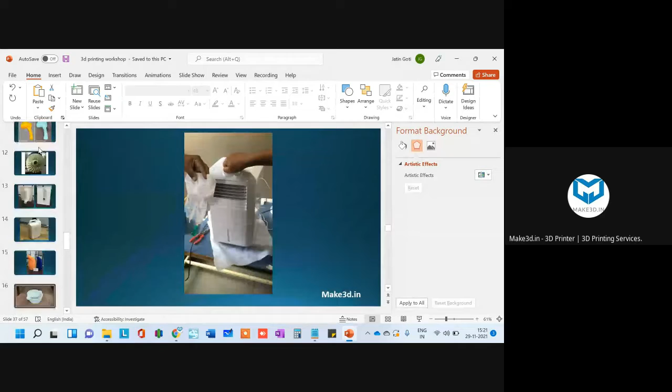In today's session, we will understand how 3D printing actually works, what 3D printing technology is, what are the different types of 3D printing technologies available in the market, and what are the applications, because application is the most important factor in accepting 3D printing technology. It's not like 3D printing can be used everywhere by everyone; there are dedicated applications where we can use it, and we need to understand that.

But before that, I just want to understand from you guys, how many of you have heard about 3D printing technology before this, and how many of you are aware of this technology? You can ping your message, let's make this session interactive. You can message yes, I am aware, if you are aware of 3D printing technology, so that I can get an idea about the audience.

Okay, Yamini said, I am aware. Great. Any other person or student who is aware about 3D printing technology?

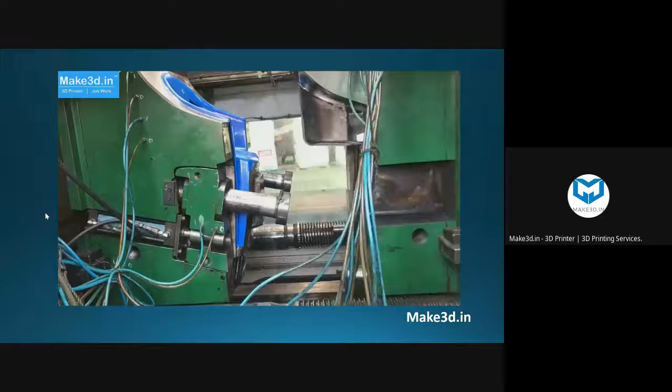So I'm going to showcase one video, kindly have a look. This is the injection molding process - it's a heavy duty injection molding machine in which male and female cavity is there, and we can make a chair out of it. By means of granules, we heat the granules, and using the injection molding process, you can see here is the mold and die - on the left hand side it's the mold and die.

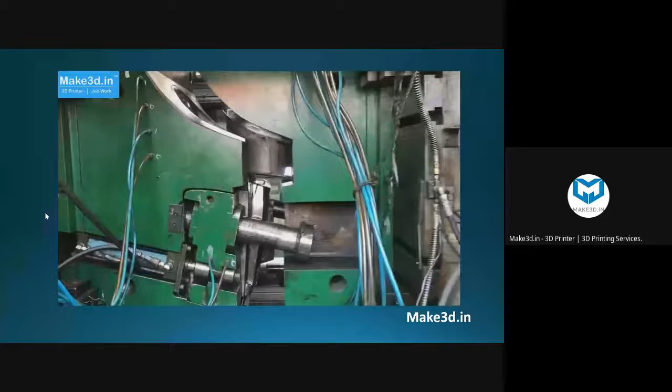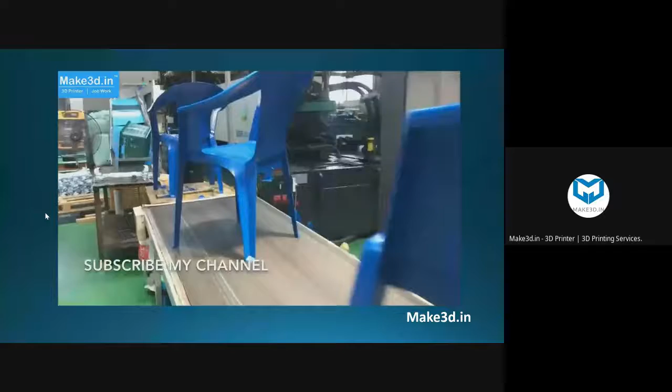By inserting the plastic granules and applying some heat, it gets converted into the shape of our cavity. From the right side you can see the different portions - the male and female cavity get converted into the shape of a cavity or die. This is the chair manufacturing process, one of the products. The same way we have different products using different processes at the same or different levels, so you'll get the idea once this video completes. Kindly have a complete look at the video - the second way, here we are making a tub, a water tub.

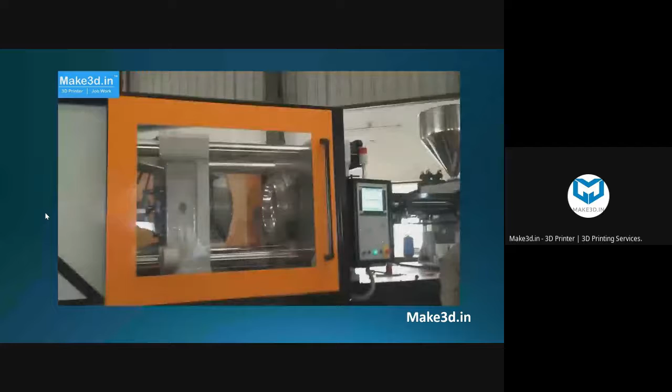Everyone aware about this product, right? So this is also used here. We can also use injection molding process. Yeah, this is the plastic water tub. Everyone can find it, right? Or everyone is aware about it. So it's an injection molding process we are following.

The orange and the black machine was the injection molding machine. This is a very desktop kind of small injection molding machine in which we are making some small plastic parts. Here also we are using die and mold. Multiple cavities are there. We are inserting the granules, and the granules get converted into the final product. But it's a desktop kind of small prototype and small injection molding machine.

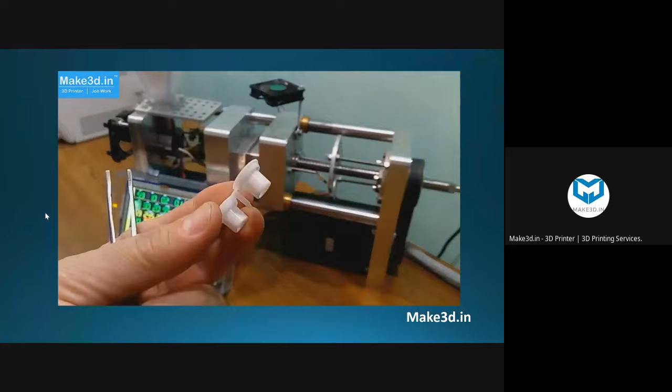So from small level plastic product to a big level or multiple uses of plastic product, or heavy duty plastic product, we have different kinds of machinery or conventional manufacturing processes to make that product. So it's our responsibility to think about it. When we are going to be an engineer, we need to think about it, like how it's made, what are the processes to follow to make such a product, right? So yeah, hopefully you get an idea about the injection molding process.

Now we need to think, or we need to understand the product from start to end, like how it's made. So we need to follow the product development process, because our today's subject is to use 3D printing technology to make innovative products, right? So that is why we are understanding the product development process. So how it actually works in the industry.

So if we consider the product development process, it falls under 4 steps: design, prototyping, verification, and manufacturing. And 3D printing technology will find application in the second and third steps, prototyping and verification. And why prototyping and verification is important, you will understand in the next slide, right? Because it's very important stuff when we are making a product. So we can't do direct design and manufacturing. We can't skip prototyping and verification step. Every industry currently follows these 4 steps to make any product: design, prototyping, verification, and manufacturing. And that is why 3D printing is useful to develop innovative products, right?

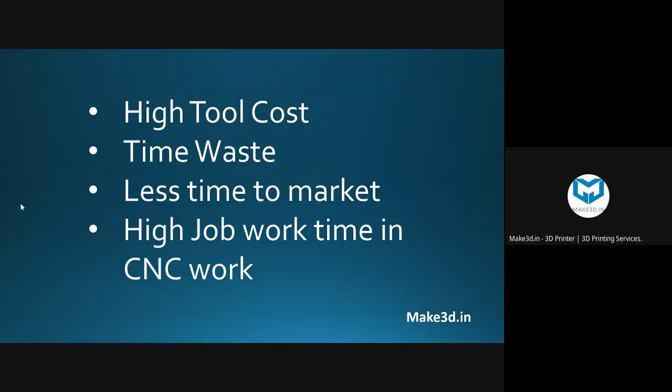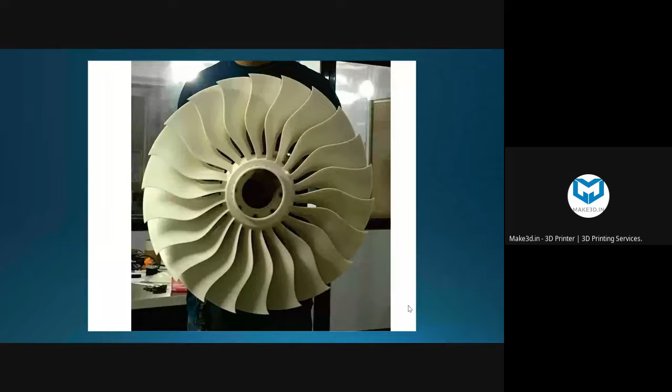So prototype, what exactly is a prototype? The prototype is a draft version of your product. Draft version means a sample version of your product which will allow you to explore the ideas and show the intention behind a feature or overall design concept before investing time and money into development. So before investing your time, money, energy into the development process, it will give you a sense of how it will look like. So this is prototyping.

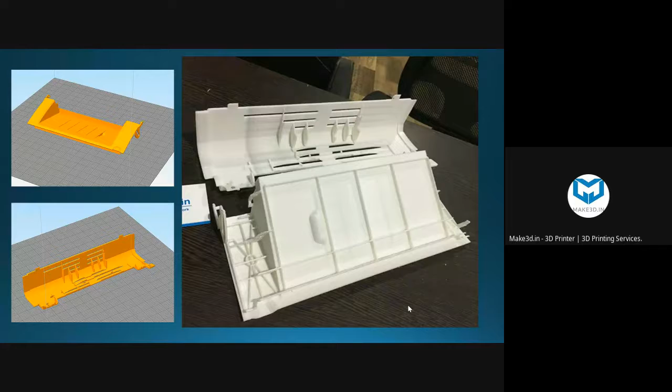This is a kind of a prototype. I'm going to show you in the very next slide so you'll get the full idea, but just have a guess, what is this actually? Looks like an enclosure cover, but it's a day-to-day use product. Every office you can find this product. Okay, no one can guess, no problem, let's move ahead.

Now, cooler? No, it's not a cooler. Now it's easy to guess. You can put your message, I'm reading your messages actually, so you can put your message. Printer, yeah, printer. Now it's easy to guess.

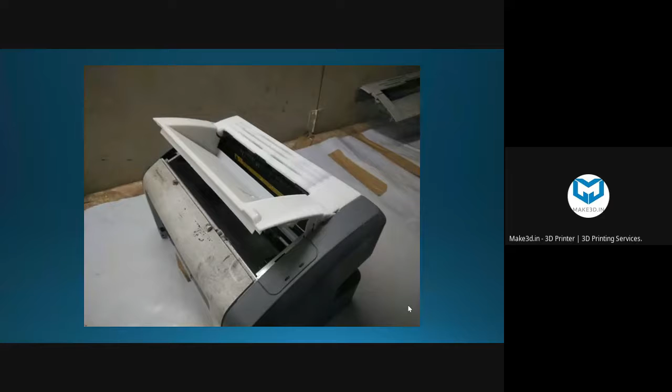So what we have done here is one of the greatest examples of using 3D printing to develop an innovative product to solve the customer's problem. We got a challenge to develop an enclosure or top cover of an HP printer. We don't have the existing part, so the designer made a design according to the existing dimensions of the printer. We made a design, we 3D printed it, we are using it, as simple as this. So this process is very convenient and very easy to use in terms of the product development process and product development cycle. For example, let me give you some points.

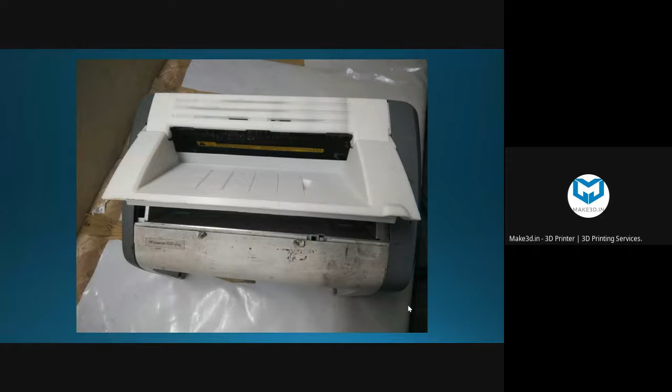So what we have achieved here by making such enclosures is it's easy for proof of concept. Our designer designed this concept, then we applied 3D printing, we tested it, and it performed very well. We can open and close it from the top end, right? So the design seems okay, meaning proof of concept, we can get a green signal, and then we can follow the injection molding process to make multiple pieces.

So for example, we are solving people's problems. Some customers having this old HP printer model are facing the same issue, they broke the top cover, they want a replacement, but they're not finding a replacement in the local market, not even with HP, because the model is outdated since 10 years, right? So how to get that spare part? Here is the answer.

Using 3D printing technology, if you need one piece, you can directly print it with a 3D printer. If you want to sell it, if you want to generate a business out of it, you do a die mold work, make a CNC VMC die, use the injection molding process as we have seen in case of the chair. You can make multiple parts, distribute it, build your distribution channel, sell those parts, and earn money. This simple way — this is also one of the examples of 3D printing technology.

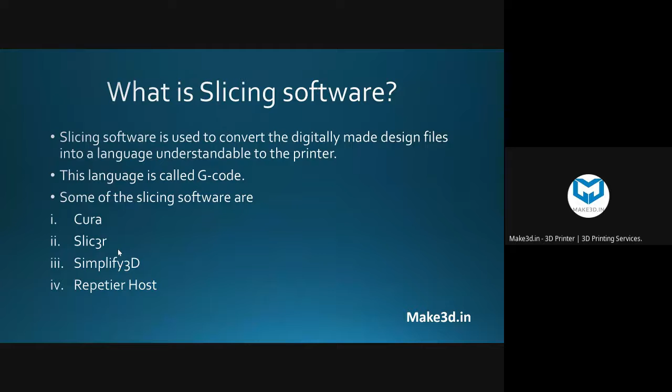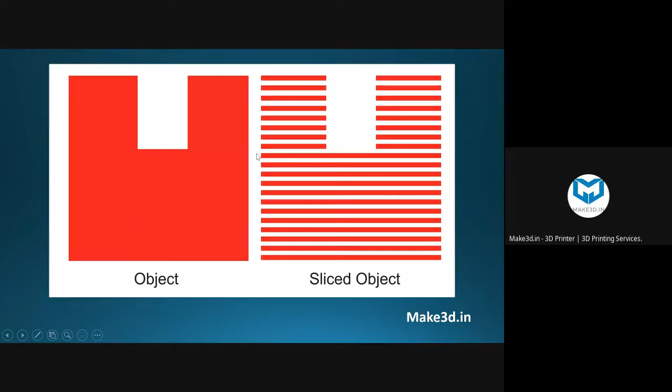Here we need to add our object. For example, if you want to make a 3D printing product, let me take any object here. So this is our object, we want to make this, so by means of prepare to print...

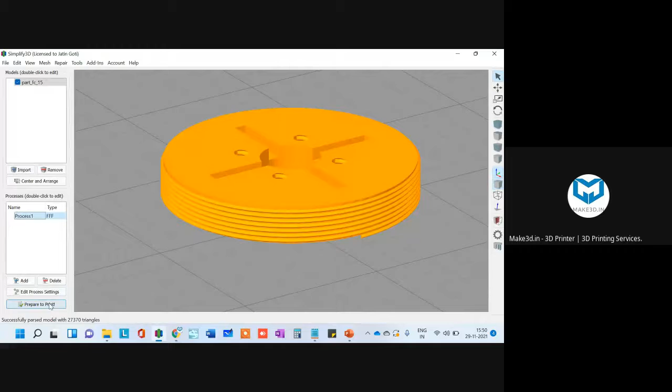you can see it gets converted into multiple layers. From the bottom, it's the first layer. Here I'm changing the number of layers - second, third, fourth, fifth, sixth, seventh. So you can see it gets converted into multiple layers. Each and every layer we are printing. How are we printing? Let me give you an idea by means of a dedicated video.

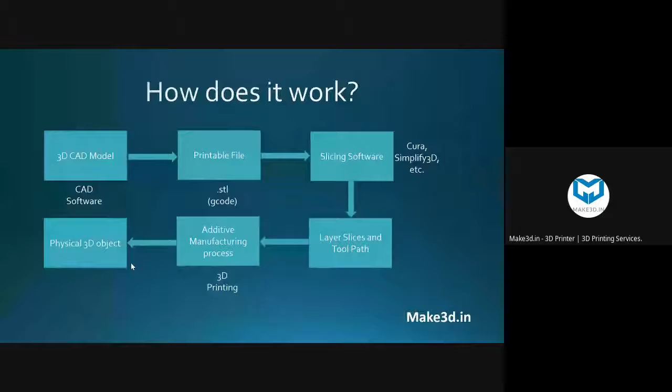Here is a video of the 3D printing process using FDM technology.

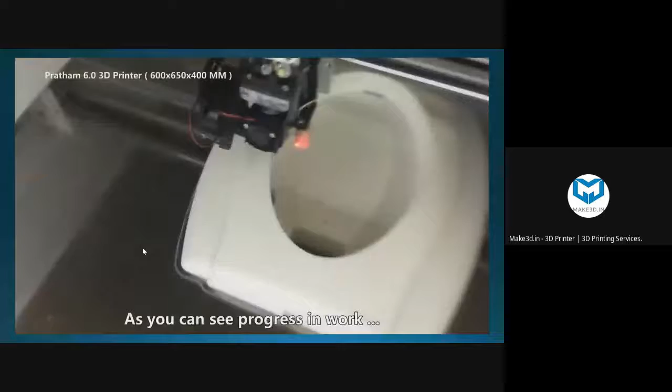So here, layer by layer, we are making this object.

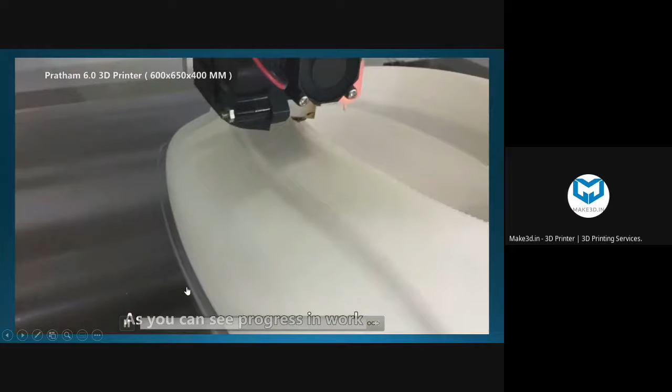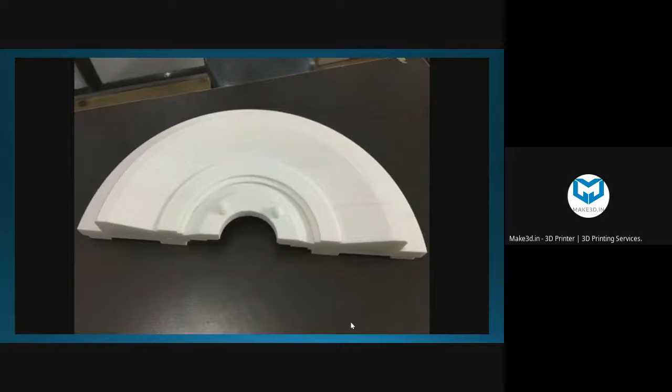Final process is going on. We have our product ready. So this is the support structure of a tabletop fan. So somewhat around all these objects we made using 3D printing technology.

So this is the basic FDM technology 3D printing process, where we use a CAD model, then we slice it, and we print it layer by layer using plastic material.

Maybe you guys have multiple questions, we will take your questions later on. Keep them written aside if you have any, related to printing process, material, time - lots of questions are there, I can understand.

But let me give you a quick idea about why 3D printing. 3D printing is for prototyping, and not only prototyping, but rapid prototyping. Rapid means immediately. As I mentioned in the previous slide, people or companies don't have time - they have very less time to market.

So rapidly they want prototyping. It will take as much as one-tenth the time compared to casting, with flexibility of choosing materials. There are multiple materials that we can choose. We can experiment with new design concepts, experiment with new, better materials, whatever is possible. We can immediately launch our product into the market.

If you don't want multiple pieces, we can market immediately. As I mentioned, in the case of the HP printer enclosure top cover we made - if you want to make 1,000 pieces, you go with die and mold. But if you want to sell just 10 pieces, if you want to solve your own problem, you can directly use it. So if you have very less time to market, you can use it.

You can use it for small batch production, as in the same case of that enclosure. If you want to make only 10 pieces because it's an outdated product - the HP printer model was outdated, so I don't need thousands of pieces, I only need 10 pieces, particularly for the person who doesn't have that top cover, who has a broken cover and wants a replacement. So you need 10 pieces or 20 pieces or 50 pieces.

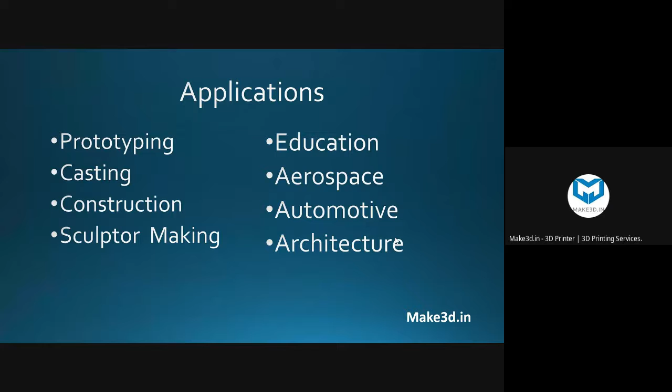Applications where it can be used: prototyping, as we have seen, casting industry, construction industry, sculpture making, education, aerospace, automotive, architecture industry, medical industry, entertainment industry - lots of applications are there. Toy making industry - all these industries can get the advantage of 3D printing technology.

After inauguration of this sculptor, L&T also want to give a small 1 feet kind of same replica once any project gets successful completion. So as a token of appreciation or as a goodwill, they are going to give 1 feet size of sculptor to their employees for successful completion of any project assigned to them. So for that also Jitu Bhai got an order, and this time they are going to use 3D printing process. The 1 feet sculpture, they are not going to make out of SS or metal, right, they are going to use 3D printing technology instead.

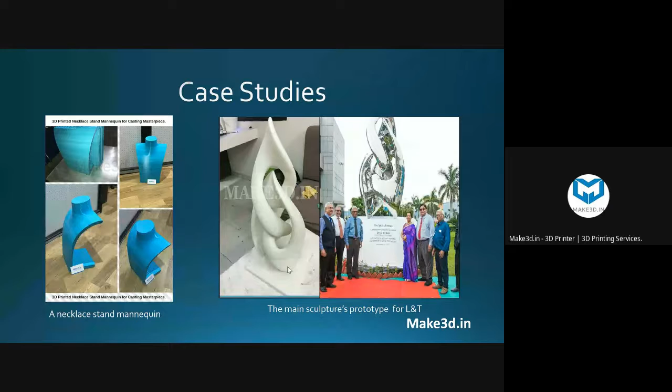So here is the case study. On the left hand side also you can see the necklace stand mannequin for casting process was printed using 3D printing technology. Here you can see the video.

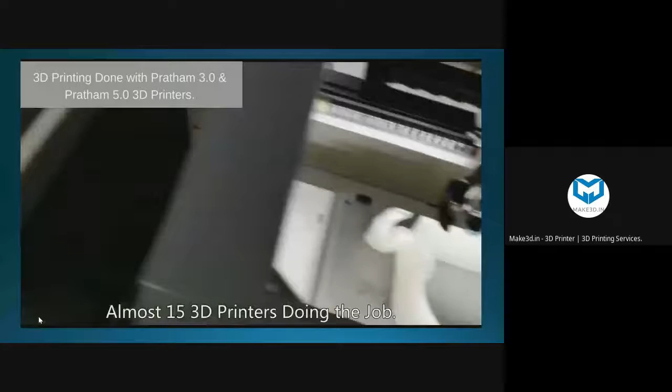Another case study which was this project was done by us. Let's see the video. This is a life size, meaning 6 feet size statue we want to make. Here we had the challenge to make it very quickly, because there was an inauguration of a village and they wanted to inaugurate it very immediately within 7 days of time. So within 5 days we needed to complete this job.

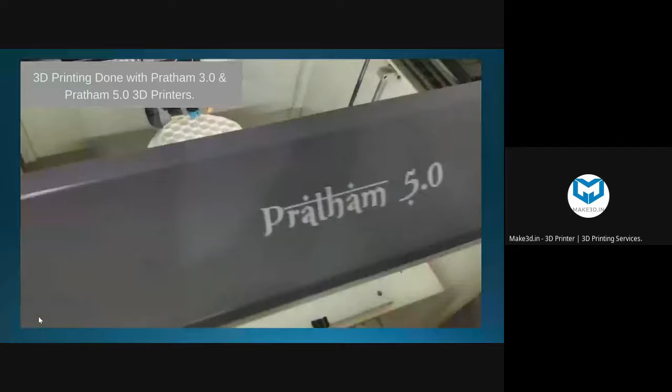So we used our maximum capacity of 22 machines. We ran each and every machine, making the statue in parts, and then joining it, as you will see in a better way in the video. By gluing it, by joining it, finally we have our model. Then we do the coloring work, and the final dispatch. So some post processing is going on.

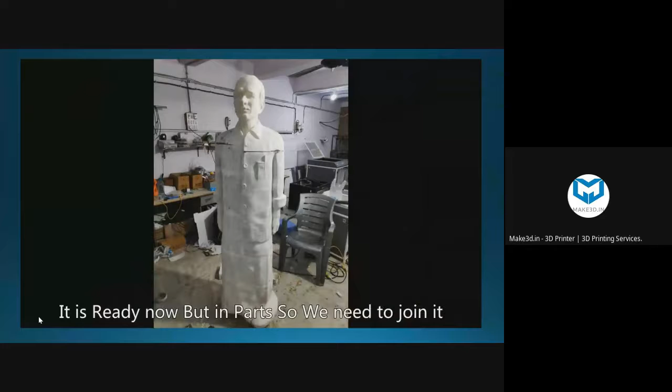So here the main important parameter is the time frame. Within 5 days of time, no one can make such a statue without 3D printing technology. Handmade process, you can forget about it. So here we are doing some coloring work. Here it is ready, and ready at 6 feet of height. You can see this, and ready for dispatch. We're dispatching it. The inauguration is done. So this is also one of the examples of making an innovative product using 3D printing technology.

Also, we can find application in metal sand casting process, where people want to develop a metal product immediately. So they want to make a casting pattern, and nowadays people are making a pattern out of wooden material, but they have the option of 3D printing technology. So they are accepting 3D printing technology to make a 3D printed pattern and then do metal sand casting. Let's see how.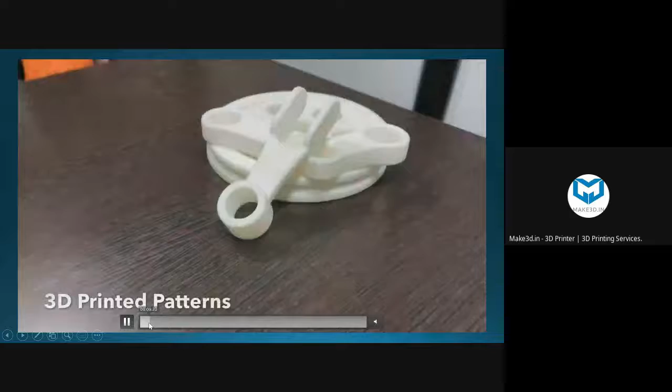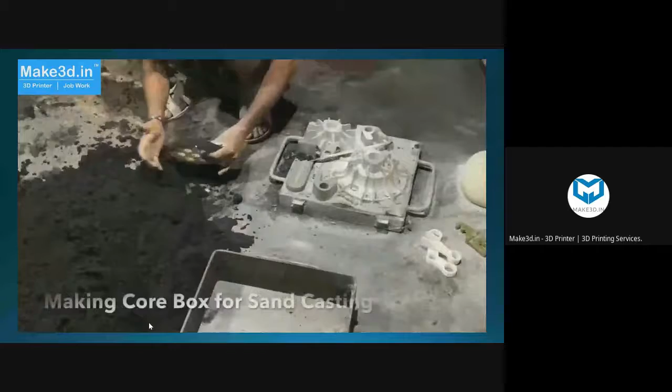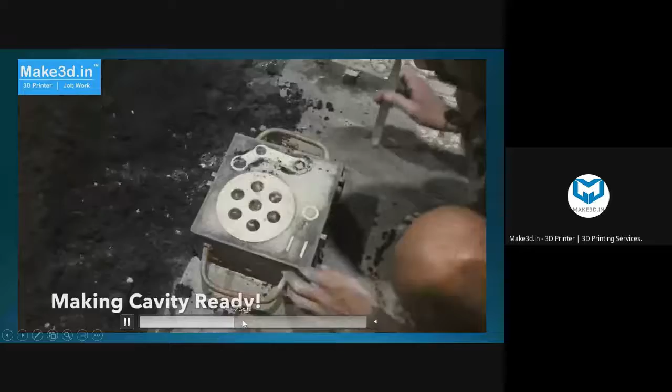These are 3D printed patterns, made using our 3D printing technology. Now we are following the sand casting process, making a core box for sand casting. This process you can better understand if it's in your curriculum of engineering, manufacturing process. If you are in the mechanical engineering department, you must be aware of this process. This is the sand casting process. We need to make a core box out of our 3D printed pattern. So this is the general process they are following.

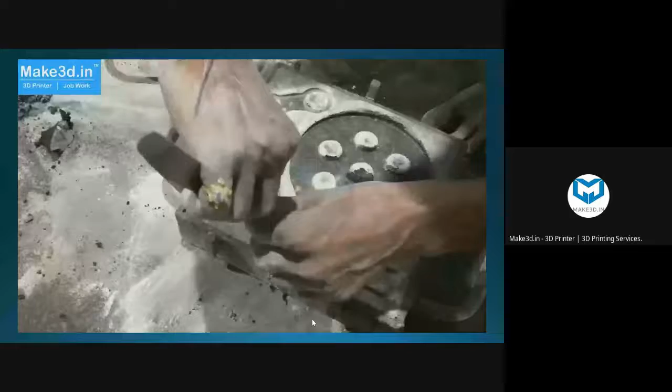They are taking out the printed pattern, converting it to a cavity. Then they will pour molten metal inside that cavity, and we will have our final metal part in hand. Yeah, this is a casted piece.

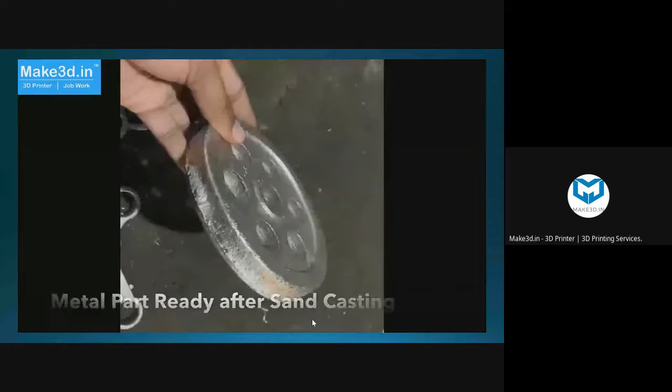Now we will do some finishing work, or machining work, on a lathe machine, and we will ultimately have our final product in hand. Yeah, removing extra material in the form of chips. So the lathe machine, you might be well aware of it, right?

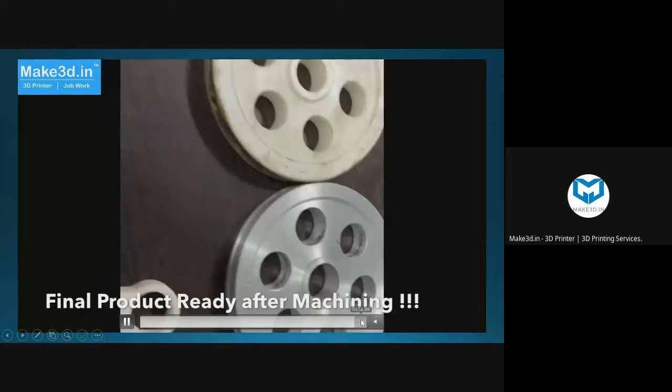So here is the application, like a metal part using a 3D printed part. This is one of the applications of 3D printing, right?

Second, the most interesting case study: we made a 3D printed cooler. The complete set of the cooler was made using the 3D printing process, and we performed practical testing. So this whole cooler is 3D printed only, and we assembled the parts and performed an actual test.

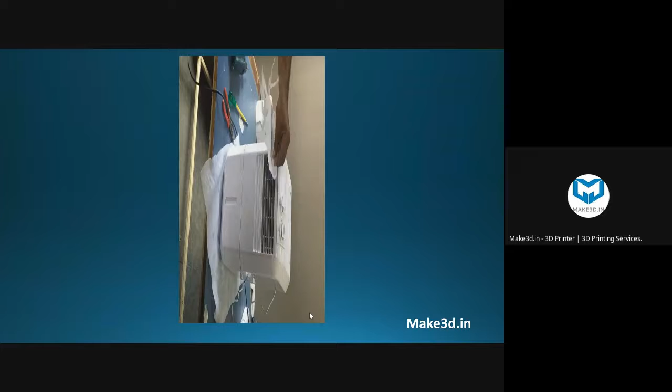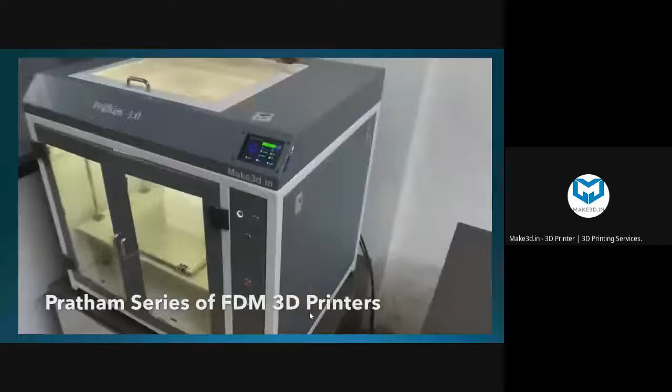This is also some of the prototypes, right? Yeah, Pratham series of FDM 3D printer. Whatever prototypes you have seen earlier were made using the Pratham series of 3D printers. So we have multiple ranges of 3D printers where we can make prototypes up to the size of 500 mm, right? 200 mm to 500 mm of size we can make.

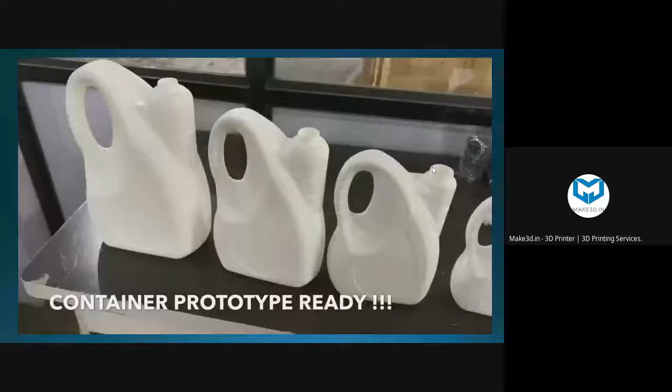Container prototype, small size to large size, is ready using 3D printing technology.

So what are the materials we can use? The material used for 3D printing is called a filament. Basically, in FDM technology, it's called a filament.

Filament comes in multiple variants like PLA, polylactic acid, ABS, acrylonitrile butadiene styrene. Then flexible, meaning rubber type material, also you can use. You can use PETG, right? So such thermoplastic material is possible to use as 3D printing material. Also, wooden type material is available, metal material is also available, carbon fiber, ceramic.

A range of materials are available to do 3D printing, and we need to follow different processes. Basically, whatever we have seen is the FDM process, fused deposition modeling, right? This is the first process in which we are using plastic material only. Then we have DLP, we have SLA, we have selective laser sintering, we have metal 3D printers. These are all the types of 3D printers based on the applications, right?

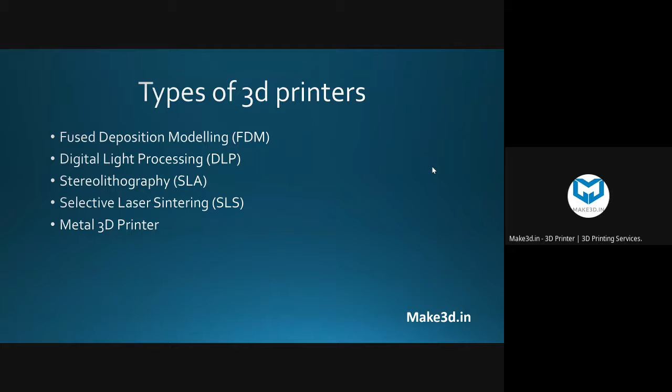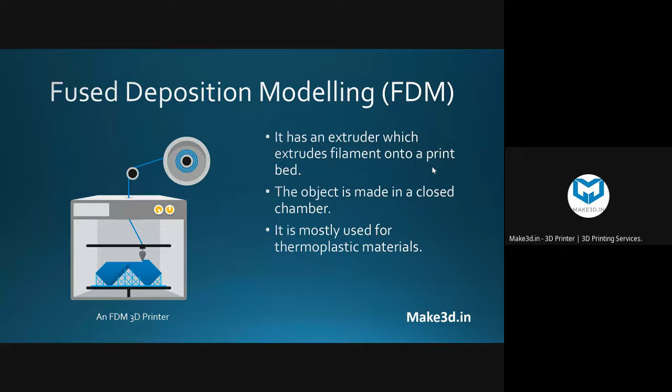So what exactly is fused deposition modeling? In FDM, we have an extruder in which we insert the filament, the plastic filament, then by means of a heater, we convert it into a semi-liquid form, and layer by layer we are depositing it and making our object. So this is the FDM process. We will give you a practical idea about the FDM process.

Then we have digital light processing, DLP technology. In DLP process, the raw material is in the form of liquid resin. It's not in the form of plastic; in DLP process, it's also a 3D printing technology, but the raw material will be in the form of liquid, and by using a UV light below it, we are converting that liquid resin into solid, because the resin is a photocurable resin. By projecting a certain wavelength UV light, it will get converted into a solid.

So let's have a quick demo of the DLP process.

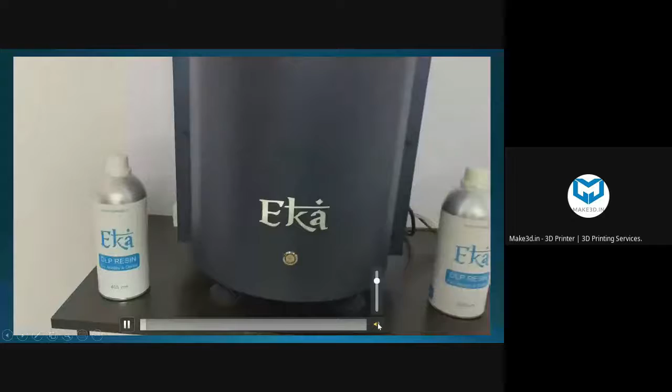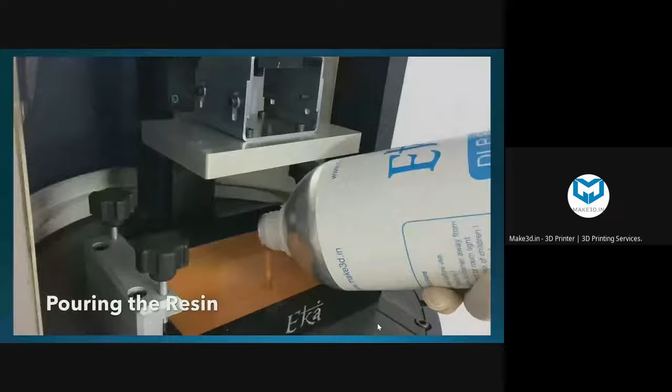Basically, this DLP process can be used in making jewelry wax pieces. In the jewelry industry, to make a masterpiece, we are using 3D printing technology, and that is why we use DLP technology, just because by means of the DLP process we will get high precision, which is required in the jewelry industry. Small features we want to make, right? That is only possible with DLP technology. So that is why there is development and availability of this process.

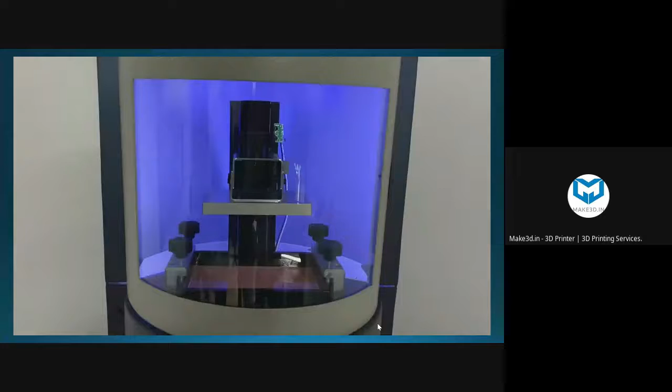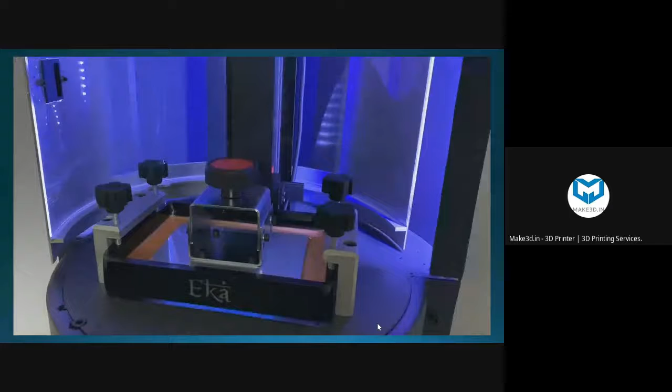All this process is called 3D printing, because we are not making any object by means of cutting it. We are making the objects by means of layer by layer adding the material. So work has been started. As you can see, the liquid tray is there, and from the bottom we are projecting the UV light, and layer by layer it's making a model.

So you will see here, after some time, there will be a bunch of rings, or you can say a masterpiece of rings, or a wax piece of rings, will get ready. And we can use that wax piece ring to convert into gold and silver by means of the investment casting process. This is the way, or this is the possibility of making an innovative product using 3D printing technology.

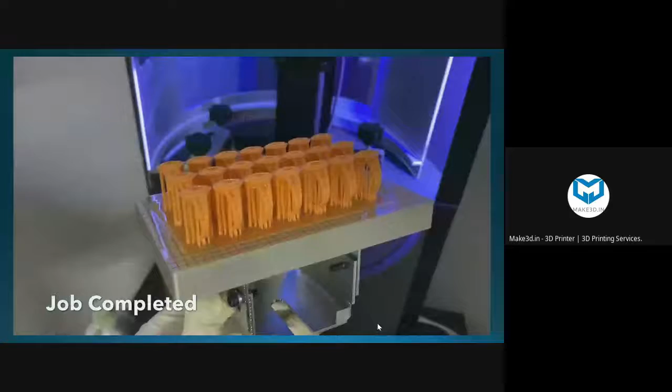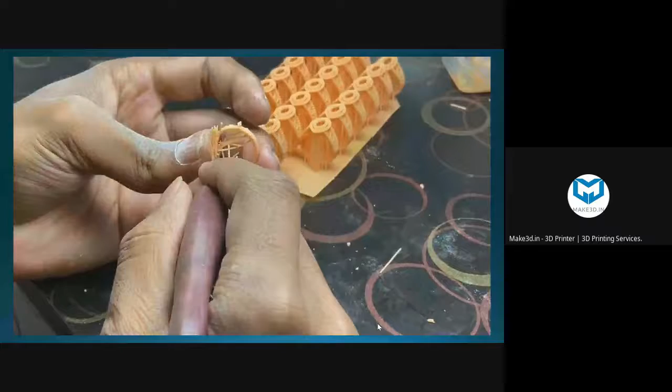So we are making innovative jewelry designs using 3D printing technology, and this is only possible by means of 3D printing, right? Before this 3D printing, the Karigar needed to carve a wax block, and to make such minor detailing work using a carving process, it seems impossible. Here we are doing some finishing work, and then we have our wax piece ready.

We will follow the investment casting process, and we can have a gold and silver ring in our hand. Almost all the jewelry industry people are using this technology nowadays. So it's another example of making an innovative product using 3D printing technology.

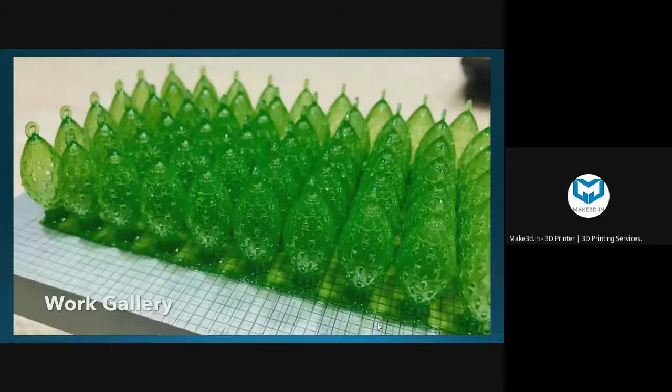So this is the DLP process actually. Each and every technology requires a minimum of 4 to 5 hours to understand deeply. It's very difficult to cover all this technology in a 1 or 2 hour session, right? So we are just giving you an idea.

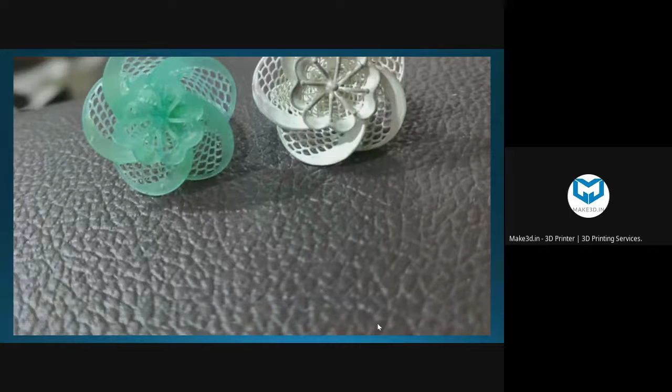This filigree work is also made using the DLP process. As you can see, the left hand side is the 3D printed ball, the right hand side is a silver ball. These are all examples of the 3D printing process for the jewelry industry.

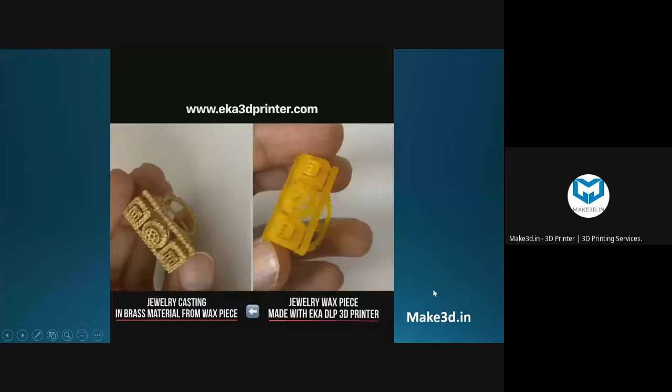Here is one quick video. The right hand side is a wax piece we made using 3D printing technology. The left hand side is a casting in brass material. So for such applications, we are using 3D printing technology.

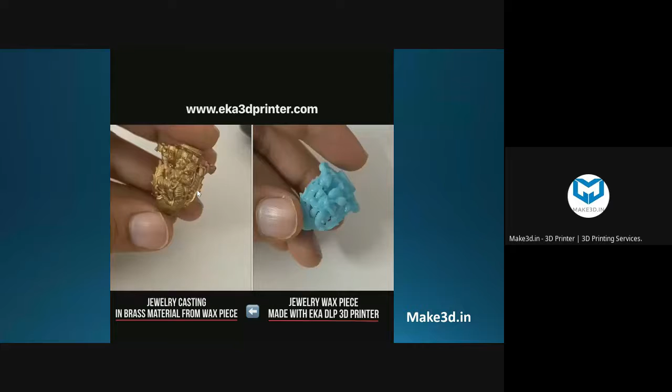And the advantage is that we can make the wax piece in 1 hour, while carving by hand takes around 6 to 7 hours for the person. We do have a challenge though, like we will not get such accuracy and precision. Here you can see the Hanuman God ring we made using 3D printing technology.

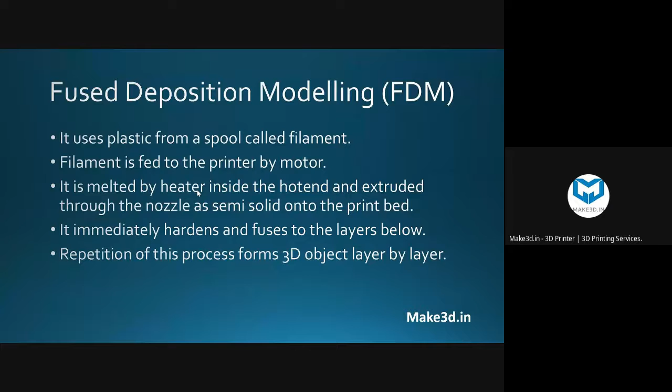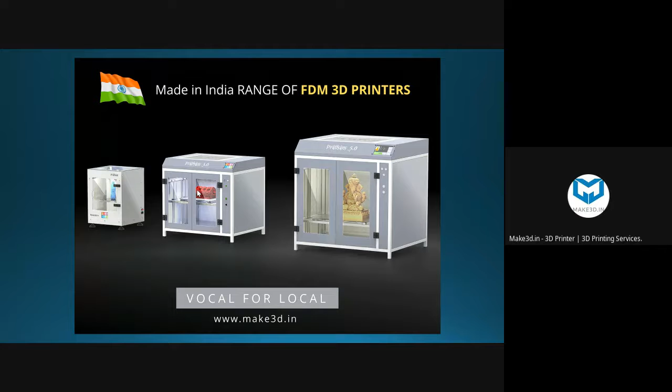Our website is make3d.in. So from small range to multiple heavy duty ranges, we have a range of 3D printers. There is also one concept of 3D scanning.

I just want to take confirmation from the sir. If we have time, we can go ahead with 3D scanning. Otherwise, we can take questions and answers. Please go ahead for another 5 or 8 minutes, and then we'll take questions. Okay, fine, so let's quickly take up 3D scanning.

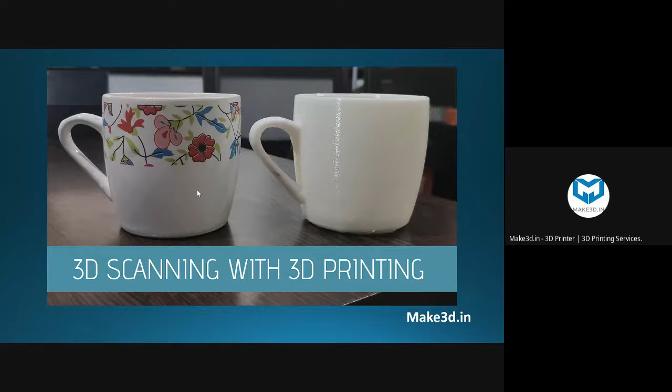So what we did is use our 3D scanner to scan it, so we have a design with us. Once we have the design, we can make a small replica or a big replica using the 3D printer machine. So we are doing the scanning.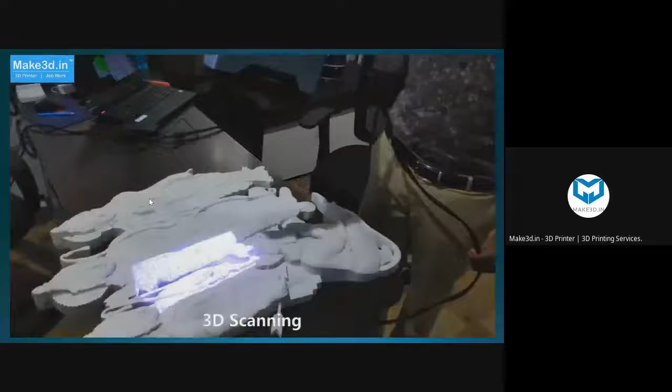As you can see, it gets immediately converted into a solid model here in the software. Whatever portion we scan, the software makes a 3D model. So it's not like you need to learn 3D designing.

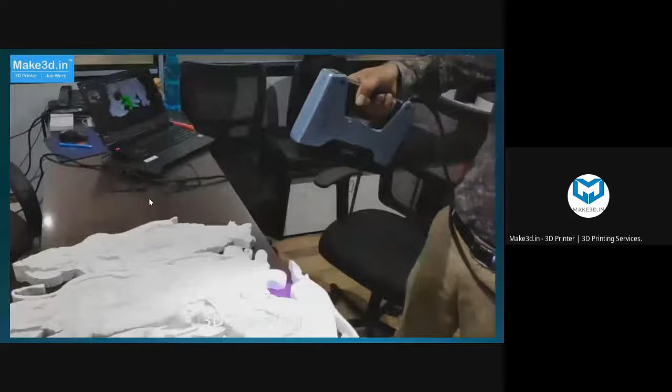You have the 3D scanner in your hand. Any industry having the option of a 3D scanner can immediately do reverse engineering of any object. They can immediately copy any object they want, and they can modify it as per the application or requirement.

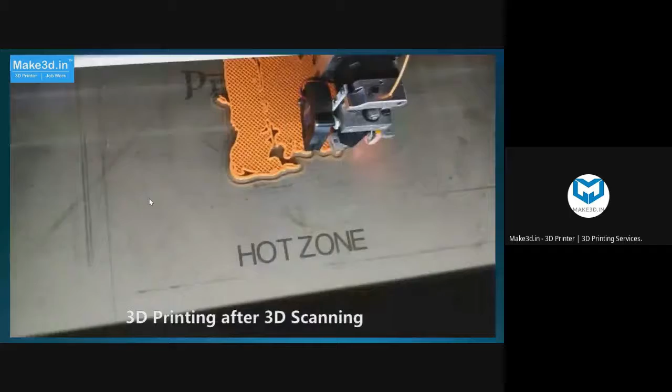Right, it's complete. So a large size statue we converted into a small tabletop statue using 3D scanning and 3D printing.

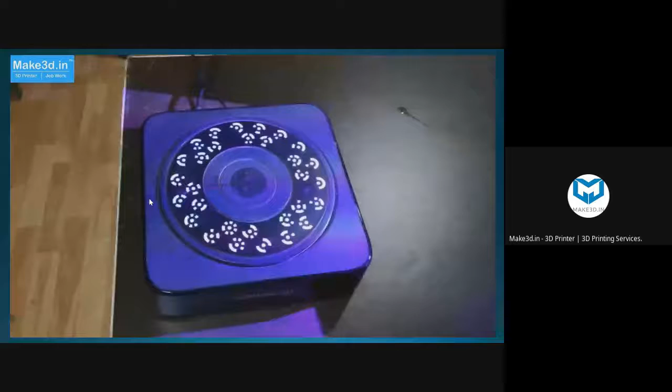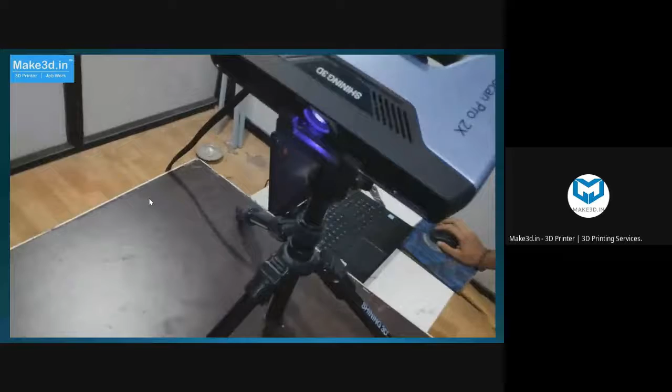Now we will see another example of a tea cup. This is the cup we want to make in plastic. We want to do some modification to it, and check it for some IoT product related work. Anyhow, for some application we want that cup in plastic. So what we have done is 3D scanning. We have a rotary table here. We will put the cup on it. It will rotate, and at the same time the scanner will capture the data. This is the fixed mode scanning.

Yeah, so the process has been started.

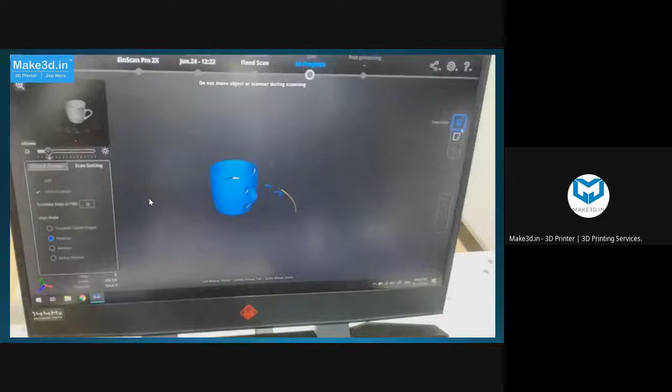On the right hand side on the laptop, you can see it's generating a 3D CAD model. Here you can see immediately it's converting into a CAD model. We can take that CAD model into a slicing software, slice it, make a program, 3D print it, and we will have a teacup replica within a fraction of hours. So using 3D printing along with 3D scanning, it's very easy and made very easy to make a replica of a product. It also helps you make an innovative product immediately.

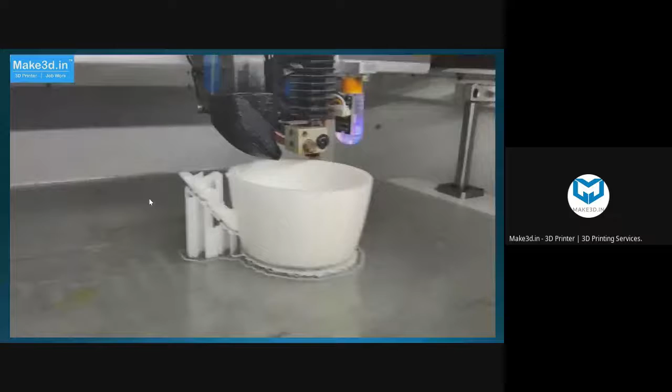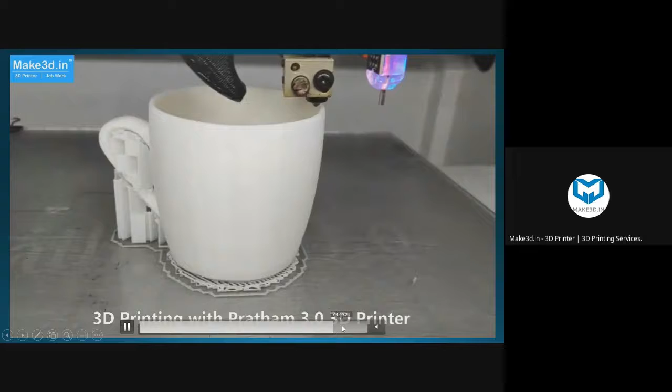Yeah, we are doing 3D printing with the Pratham 3.0 printer. Final step is there. Yeah, it's ready. So this is the magic of 3D printing.

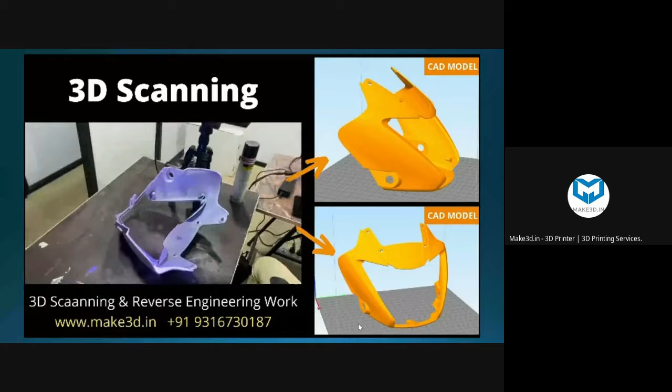Here is a quick demo of an engineering part, 3D scanning of the visor of a bike. Mudguard scanning is there, so we scanned a mudguard. The mudguard manufacturer wants to make a replica of the original part. So by doing 3D scanning they can have a CAD model, do 3D printing, test it, and verify it. If they find it suitable, they go ahead with injection molding to make thousands of pieces and generate their business. They can do modifications on the design and make an innovative product, which is possible using 3D printing.

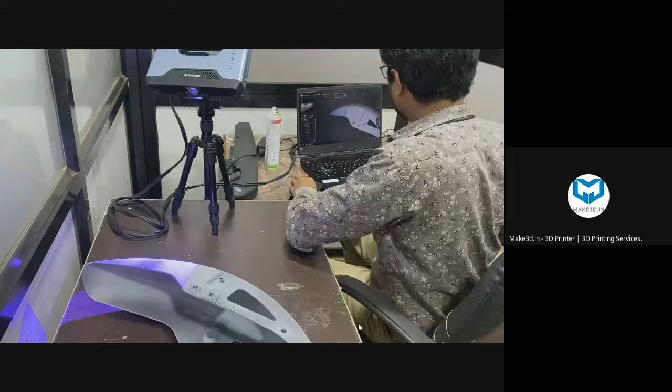Software used for designing is Solid Edge. You can also use SolidWorks. There are lots of software available.

We will take more sessions in the near future to understand each and every department. For example, architects: how they can take advantage of 3D printing technology, why they want to use it, what the applications are. Artists, why they can use it, R&D people, why to use it, what the advantages are. We can take all these sessions.

For students, it's very important to use 3D printing technology because it will promote innovative thinking. With 3D printing, you don't have any limitation. Before 3D printing was in the market, if you wanted to make some prototype or object, you needed to go to a local industry or market where industries use CNC, VMC, lathe machine processes, but they will not entertain you for a single piece of object.

It's a very painful thing, because I personally felt this during 2012, 2013, where for the development of an engineering project we wanted to make some small spare parts. For those customized spare parts, people didn't want to entertain us because it's a low value cost product, but we only wanted one piece. So the existing industry in the market doesn't want to entertain you because they don't find interest in handling a student. So 3D printing gives you a chance, because you don't need help from any existing industry. You have a 3D printer in your lab or at home, you can design, and you're able to make spare parts. So that's an advantage for students, who can take maximum advantage out of 3D printing.